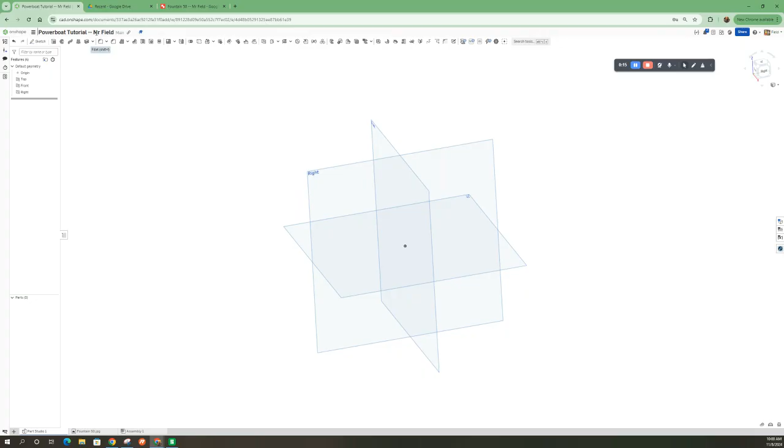I've got my drawing, I'm going to use it. So I'm going to say file, download, JPEG. And over here, get it started. On the right plane, a sketch. I need to insert the image, so I say import, pick it from my download folder, and click that out.

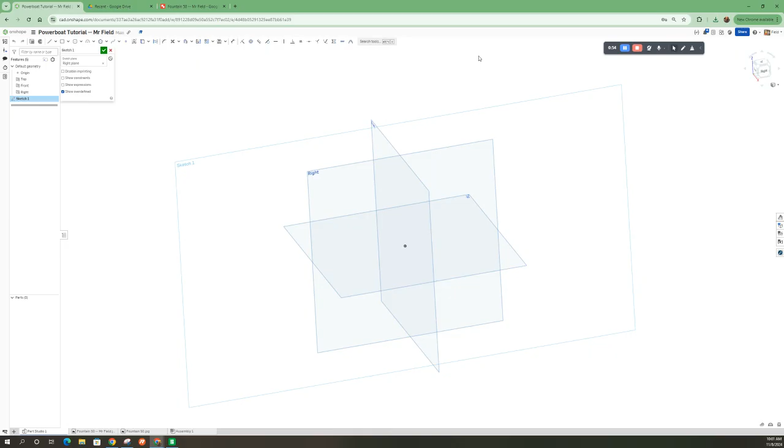So now it's in the computer, and I'm in a sketch environment. So now I can insert the image. And it says draw the rectangle. I don't know if there's any rhyme or reason to where this has got to sit in the model. I'm just going to put it in the middle, maybe right there.

Okay, sizing. I'm going to go for about, like my rocket, around 16, 18 inches for the length of my boat. But it will really depend on what you're going for. If you're doing a bigger ship or something bigger, you might want to try for a longer length. Remember, we can only print 10 inches at a time, so if you go for anything bigger than 20 inches, it's going to be at least 3 pieces. I'm open to 3, 4, 5 pieces if you desire.

Okay, so I'm going to dimension that line. And this one, I say 16 inches. I'm going to go 18. So you see, if I put that line from the tip to the thing and then dimension it and type in the number, it adjusted the image to that. It's a little trick that Onshape does. And we will take it.

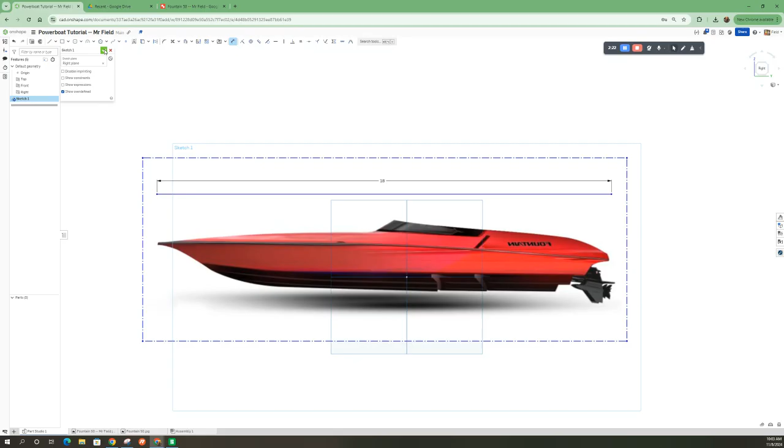Now, just to start modeling, we're going to have to keep all of these simple. I'm going to show you how to do a fairly simple hull for a boat. And that's the hull. This boat is almost all hull. Some boats have more on top and some boats have less, but we're just going to start with a pretty basic hull. Won't get this shape exactly, but I can work on it later to get changes to it.

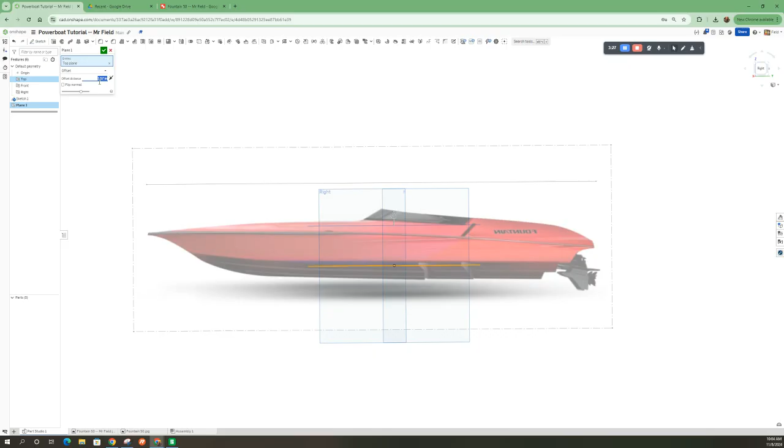So what I want to talk about is the fact that I need a top deck for the boat. All these boats are going to need a top deck. Okay, so let's start by making a plane that's offset from the ground plane up here. See how you can add a new plane in here and pick a point where you think is the deck of the boat. I'm going to probably stop about there, and you can see it's almost 1.5 inches up right there. Let me just round that up to 1.6.

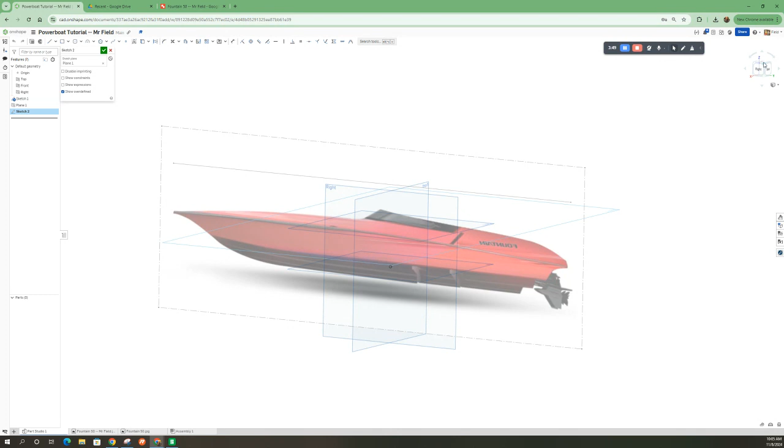Okay, I'm going to start by doing a sketch on this deck. As you may guess, I'll do the top sketch of the boat. And I only have this one view of my fountain. It's a Fountain 42. And I think images—actually, I'm going to go to images real quick and see if I can get more of a top view.

In fact, I might say top. And you can see I'm not getting anything exact, but I can glean that this thing is basically shaped like a bullet, right? Pretty simple, and a lot of the boats will be generally something like that. So that gives me an idea.

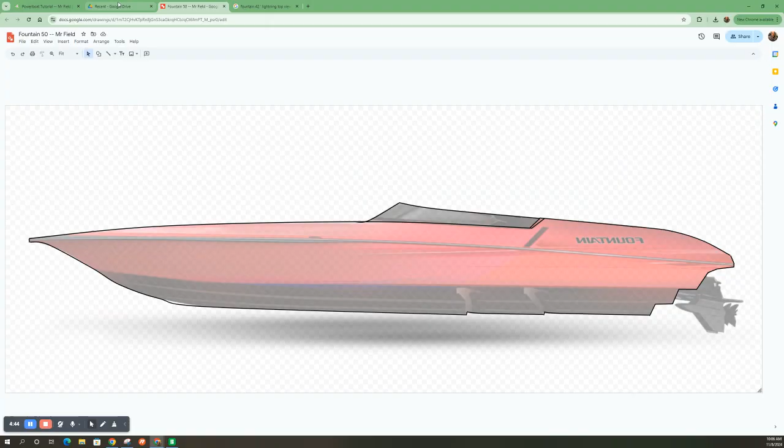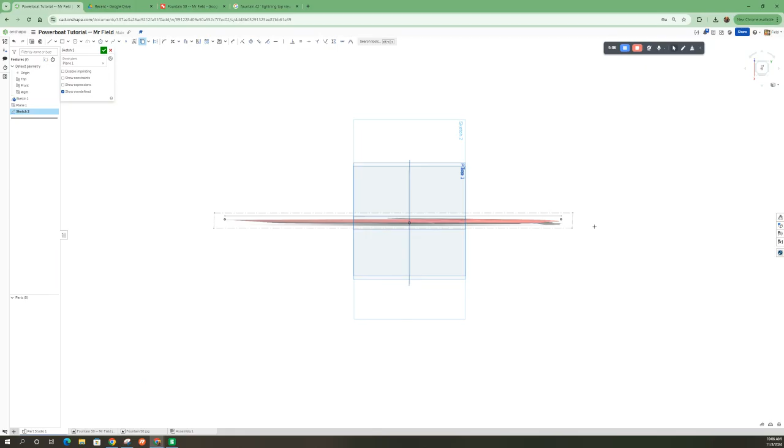Now I know, so I'm going to go ahead and use my handy dandy spline tool. The front of the boat is right there at the front of that line. I might do a trick where I'll just put that point in right there and that rear point in right there. Now I'll go back, look at this thing on top. So my spline is going to go from that to that. There we go. Spline, click.

All right, we got a bullet basically. I'm going to go ahead and click.

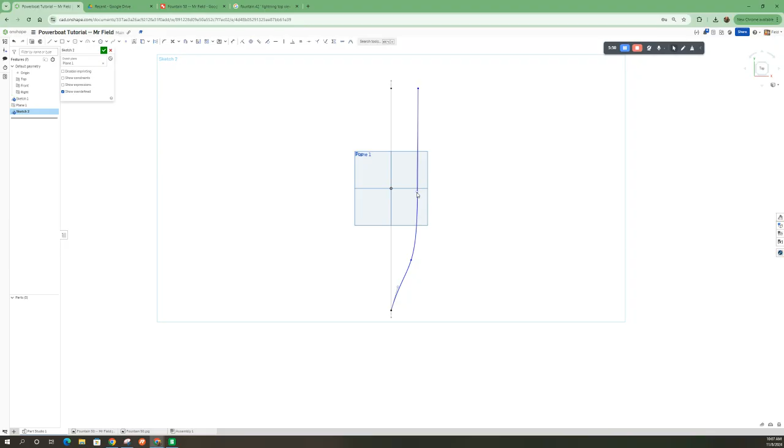Now the Fountain has a little kick where it kind of gets a little pointy at the beginning. I like that actually about that boat. And I may decide to straighten out the side a little bit. There we go, I'm happy with that.

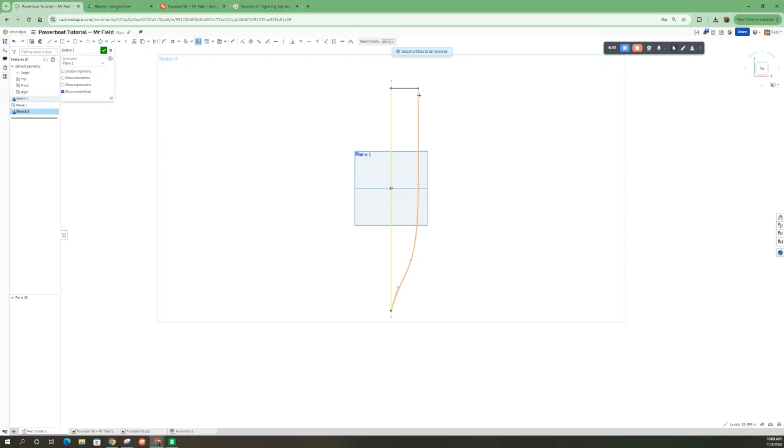I'm going to close the back. Now, of course, please don't try and make a copy of that on the other side when there's this great tool called the mirror tool. I'm going to pick the mirror line there and enter the mirror. It'll be that. Boom. All right, good, that's the start of my boat.

As you may guess, the best thing next to do is get this side profile. We can do that right here in the right plane. Hit sketch. Boom.

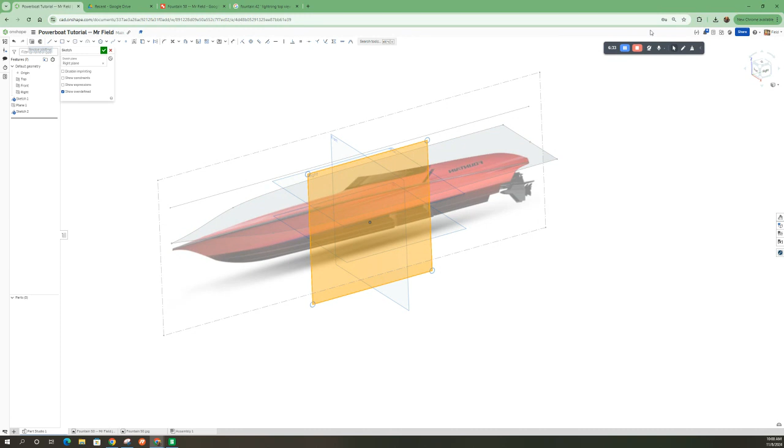Again, spline tool, and I'm going to also, before I do that, let's hit that use tool again. Use that and use that. You can see it's got one bend there and probably one bend right there. And these little notches in here, I'll probably dare to put those in later. So let's just ignore that right now. And you can see these two I can put in later.

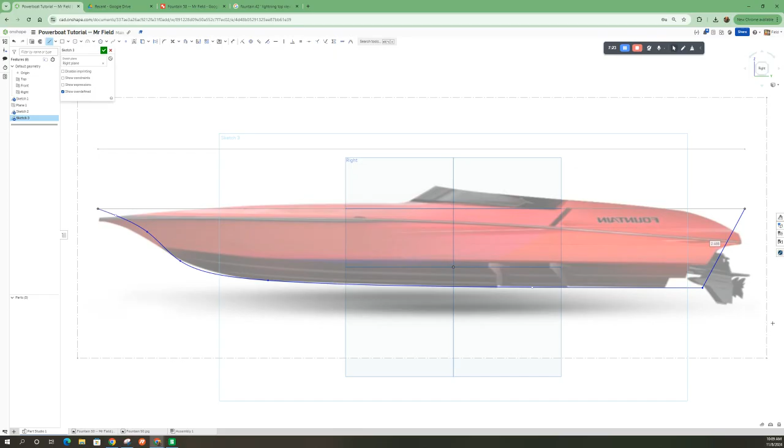So I'm just going to go here and approximate a back right there and double click. And then I'm going to finish mine off with a straight line. And then I'm going to go ahead, I think, oops. I'll go ahead now and also put a line going all the way down. Okay.

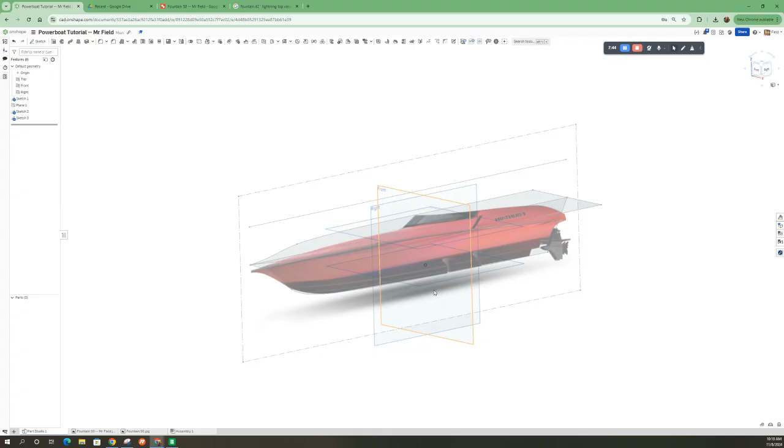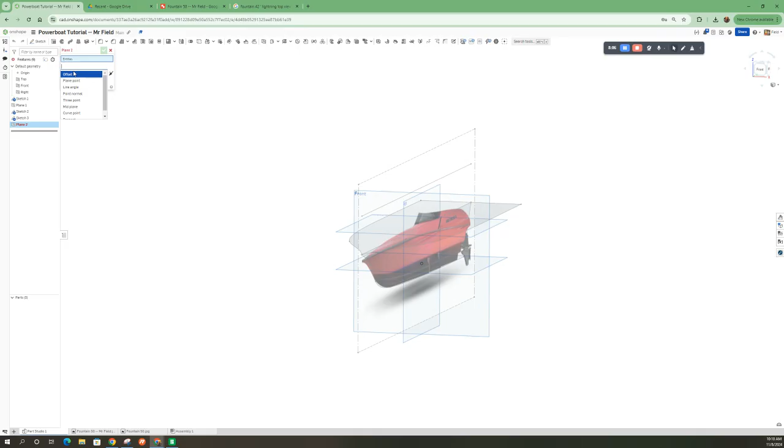Then one other sketch element, at least one other that I need for these boats, is going to be a plane that is 60 degrees on both sides, spline. So let me show it to you. You're going to need to create a plane. In this case, line and angle. And you're going to pick that line and angle 60 degrees. Now, not everybody has to do 60 degrees because we can vary that and change that depending on the boat. But that should get stuff.

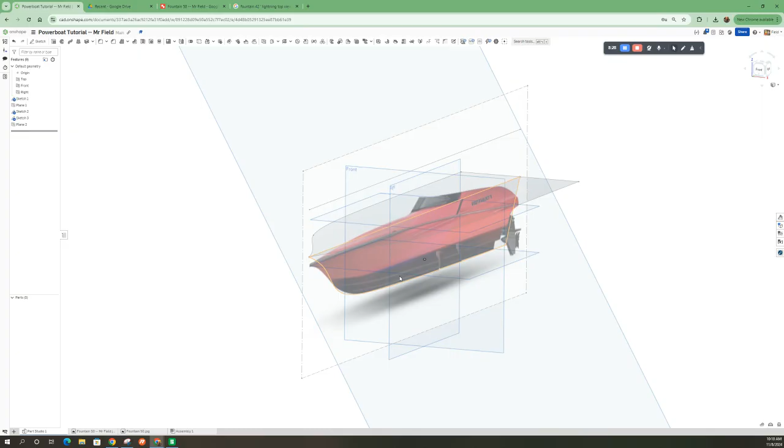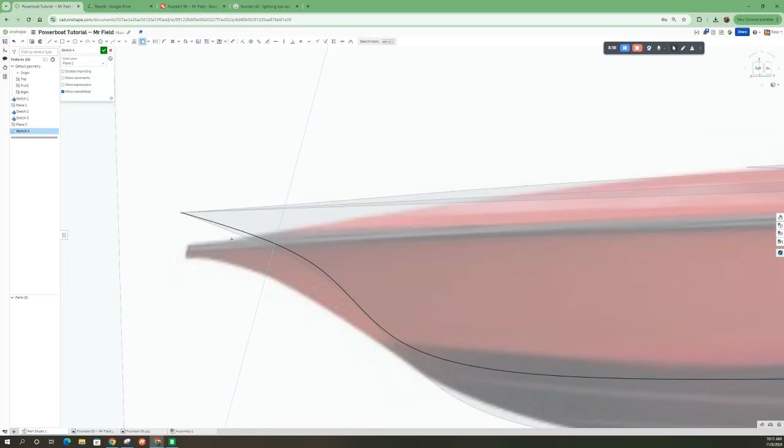Now that I've got that plane put in, I'm going to sketch on it. And I'm going to use this line that I already created. I click on it and you see it puts a projection of that onto that plane that I just built. Luckily enough, it goes right to the same point. And I'm also going to pick this back up.

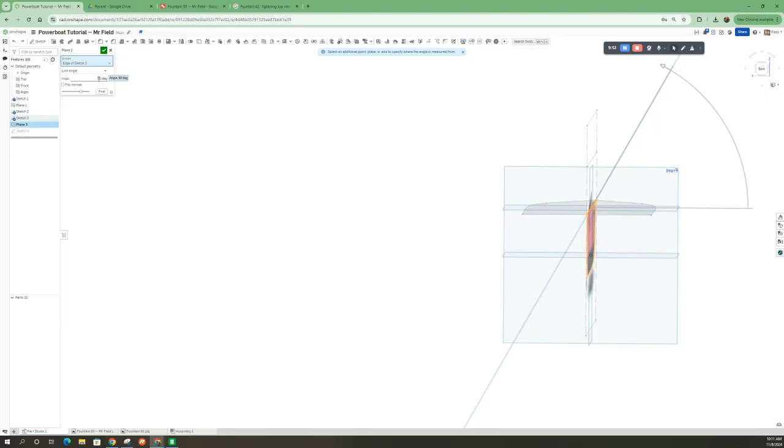And I'm actually looking at this thinking I probably should have changed that angle. So watch, let's see if I can update it. On this plane, if I go to angle 45, that's going to be better. There it goes, and it kind of updated that line.

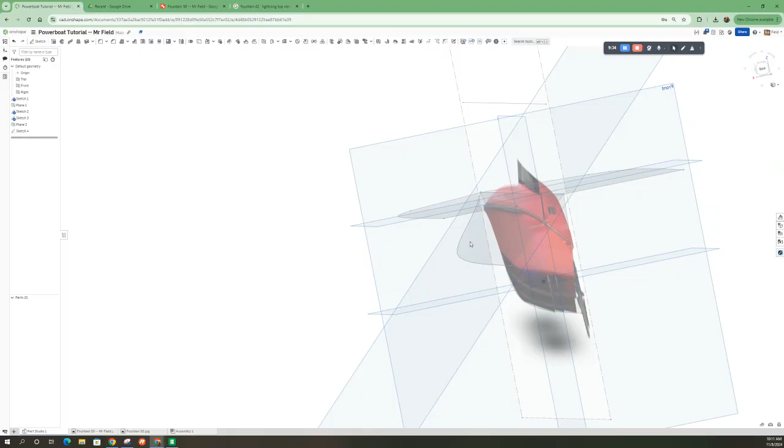Now, I'm not sold that that's exactly what I'll need for a curve. So I'm going to go create another one and you'll see what I need here. So I'm going to go back into this sketch. I feel like this was not as far out as I want it for the hull of my boat. And so I'm going to create another one.

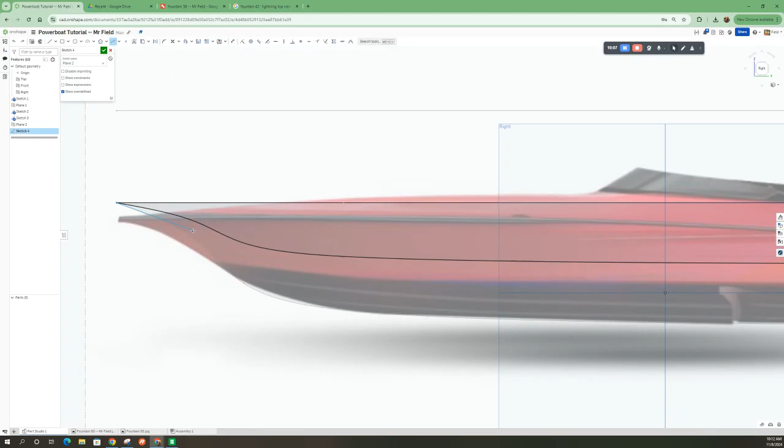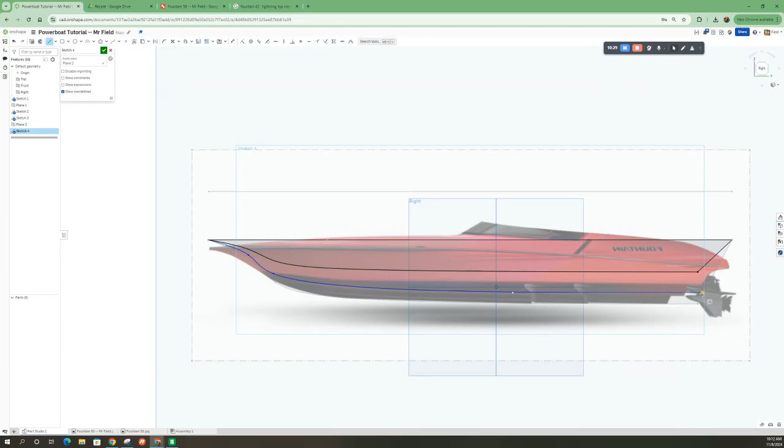In this case, I'm going to go, it's kind of where that dark line is, you're seeing that. And in this case, I'll probably go right to this back edge here, double click. So now that sketch has got a couple different curves in it. You can see the one that I thought I needed way further out. Maybe a little too far out, but I'm not going to stress because I can go change that.

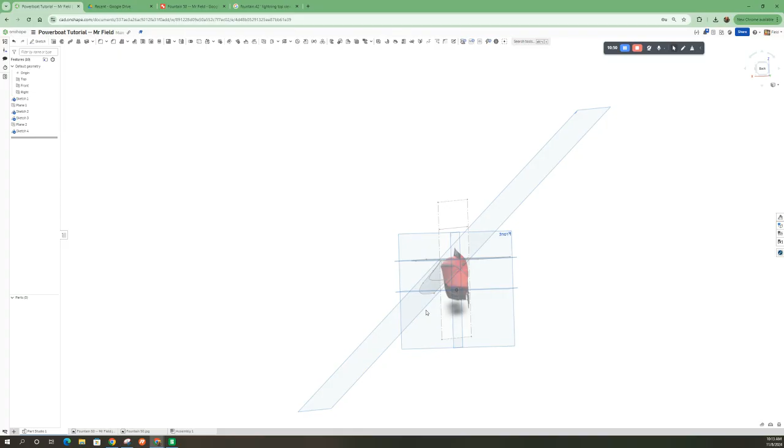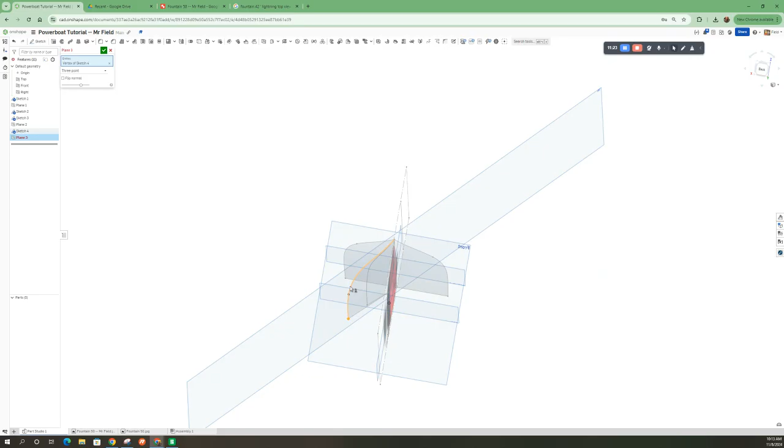I need now, because the front all comes to a point, this back edge here, I'm going to need to create a tying sketch element from this point to this point and to this point. So I'm going to make a plane, it's a 3 point. And then I'm going to pick uno, dos, tres. There we go, here's my back deck.

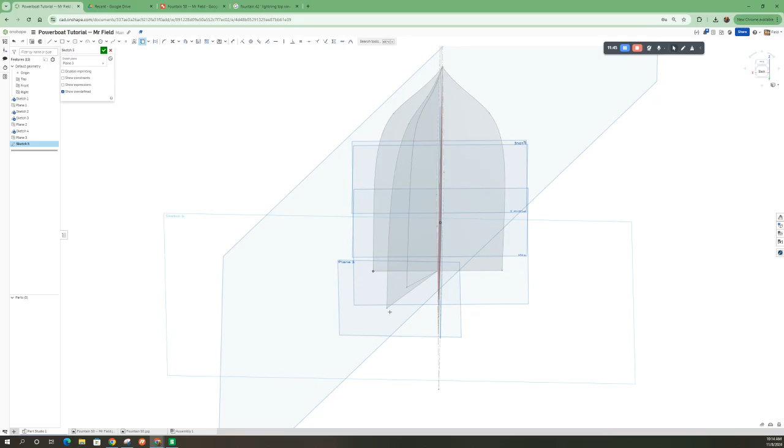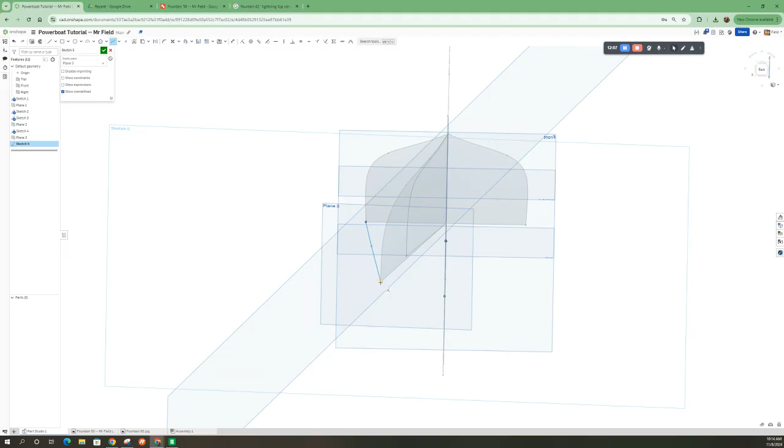It depends on what I'm going for here for my boat. I'm just going to double click right there to end it. And I'll put a little concave contour here like this. And then one more line going all the way up to the back. I think that line already exists.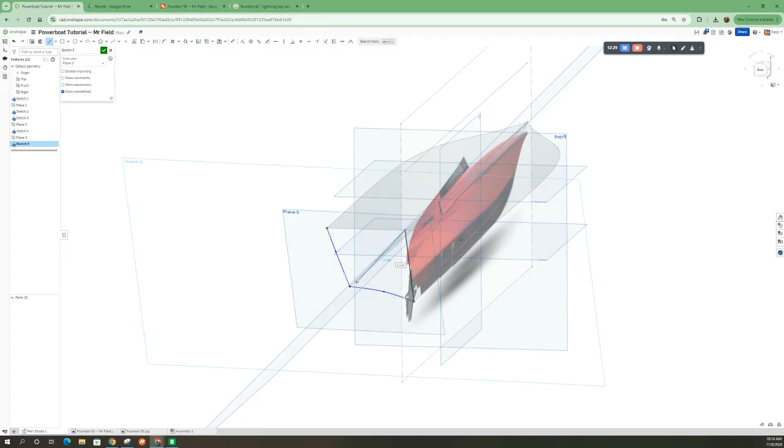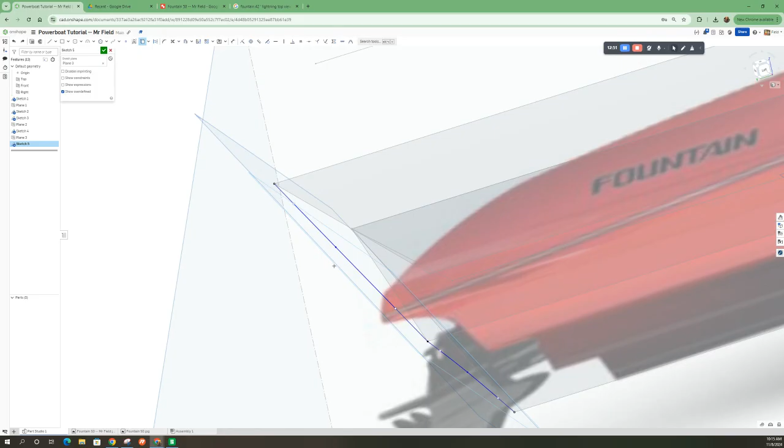Actually, I think I may have mispicked there. Gotta be careful sometimes. There it is. In fact, I better be really careful. See how that is actually, my plane is coming back right now to that point in particular, and I can see that as being an issue with this whole thing if we're not careful.

And I probably will have to fix that. But I'm looking at that. And I'm going to keep going, and you're going to kind of see what's going to happen here.

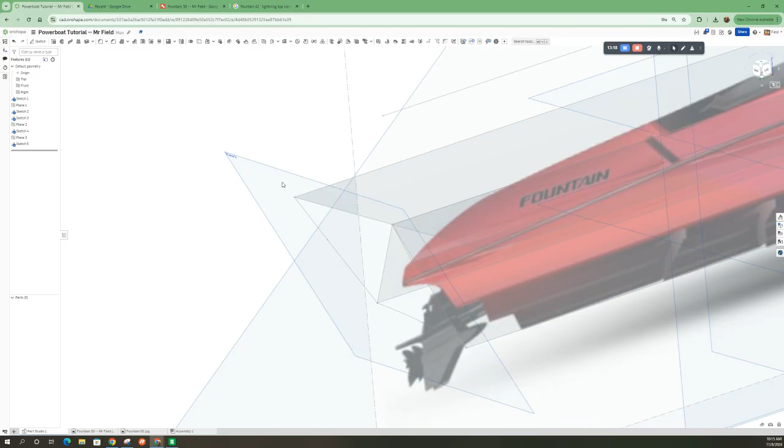Now that I've got all these created, I'm going to do myself a favor, right click, and hide all planes. Clean this up a little bit and see more so what I created. It really should be like a wireframe that I created, because that's kind of a tool we're going to use to create this as well.

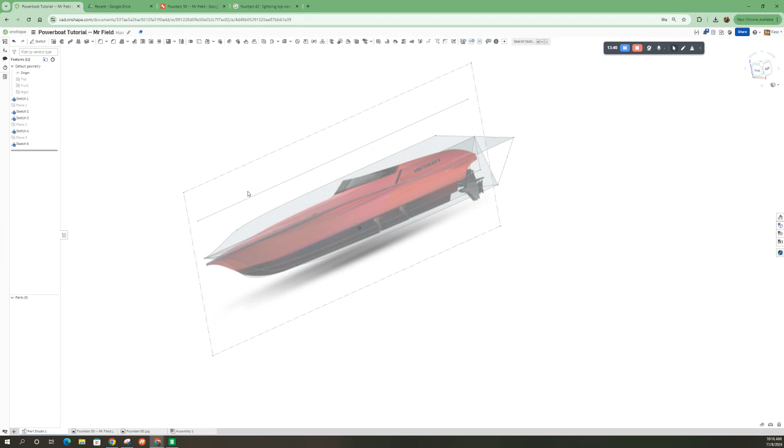I'm going to hide - actually, you can see it a little better. I'm going to also put it in perspective view. Kind of see what we created here.

And now I'm going to go ahead and just try for this first element that you're going to do to start creating the boat, which is the fill tool. And it will put a face. If you have the wireframe created, it can put a face in.

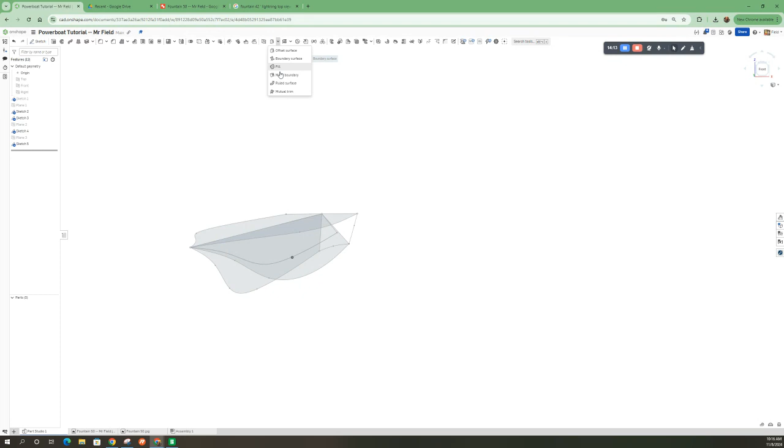I just have to find it real quick. It's under here, that's right. So this little icon here, offset surface, and change that to fill. I'm going to pick this contour, I'm going to pick this contour, and lastly I'm going to pick this contour. Okay, see that? There we go.

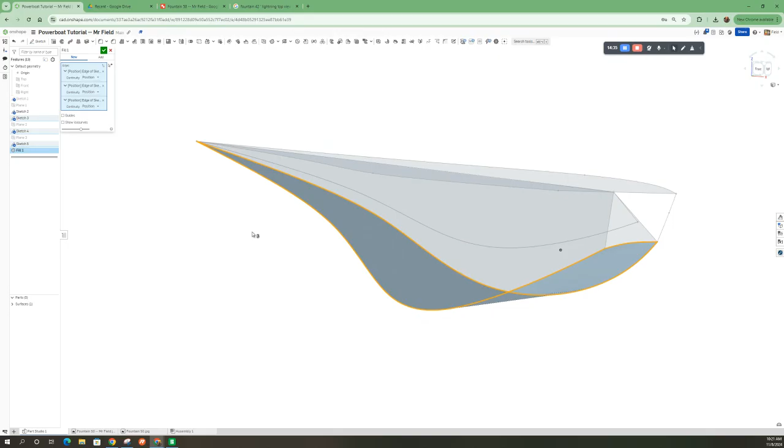We're on our way to a boat. Okay, so I just looked at the time, I'm almost at a 15-minute video here, so I kind of want to end it there. And hopefully I've showed you enough to kind of play with this and get started.

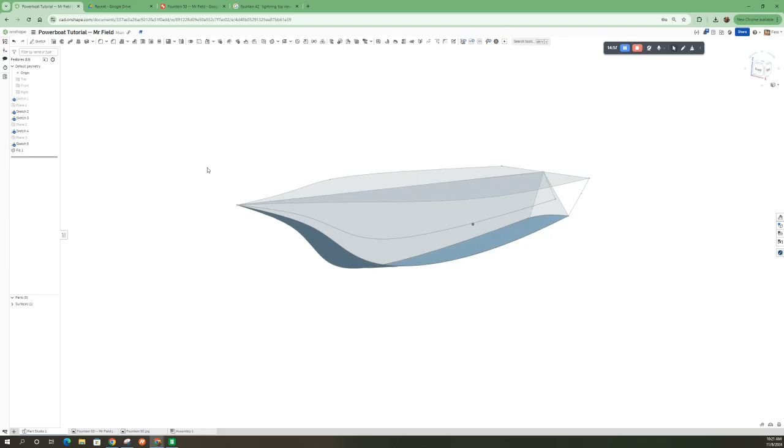I'm going to accept that. I want to, you can see that it kind of no-show, because I can use some of the sketches. They do what's called consume them, which is just no-show them. So I'm going to put them back in play here, because I'm going to do this one more time and show you.

Again, the fill - I have this wireframe, and this wireframe. You see it's going to do add, so it's going to add that to the existing surface. And I'm going to go ahead and accept that.

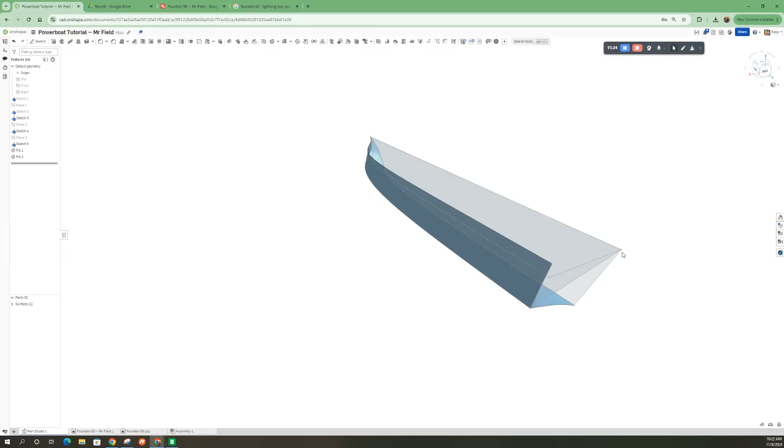Now this is the one where I'm going to have a problem, because I don't have the line correctly put in between these two, and that's really all I have to fix here. And how I would approach that is, again, create another plane - that's just a 3-point plane, and you're going to have a point there and a point there for sure.

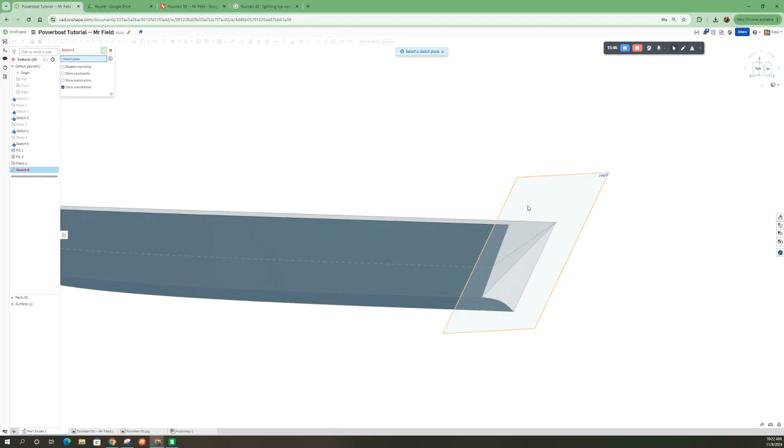And I might decide to select this spot right there, accept it, sketch on this new plane, and just put my line in. And I'm going to go ahead and see it highlights it. So I guess I don't need to use the use tool in this case, so I'll forego it. There we go.

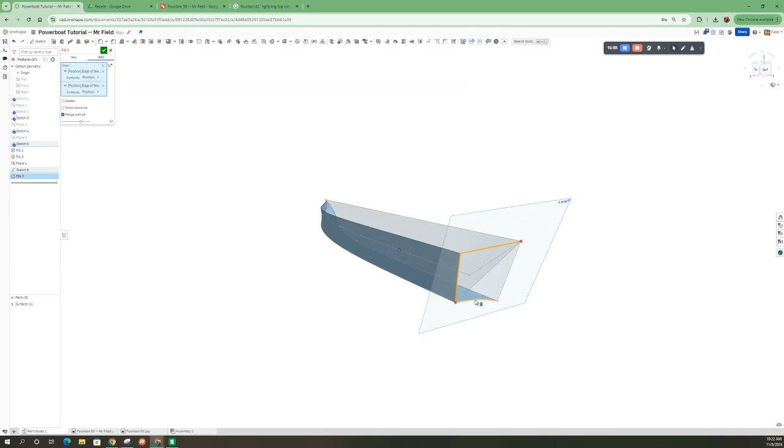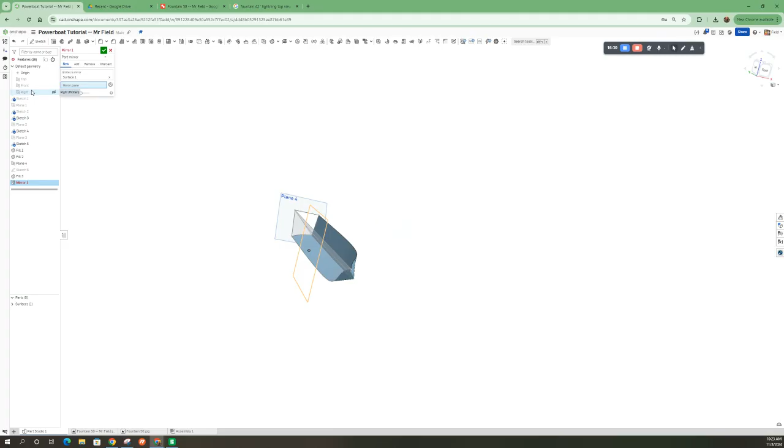Okay, there we go. I've got my start, and I'm going to go ahead and finish for right now. We'll do thicken and stuff later. Okay, that's good enough for now.